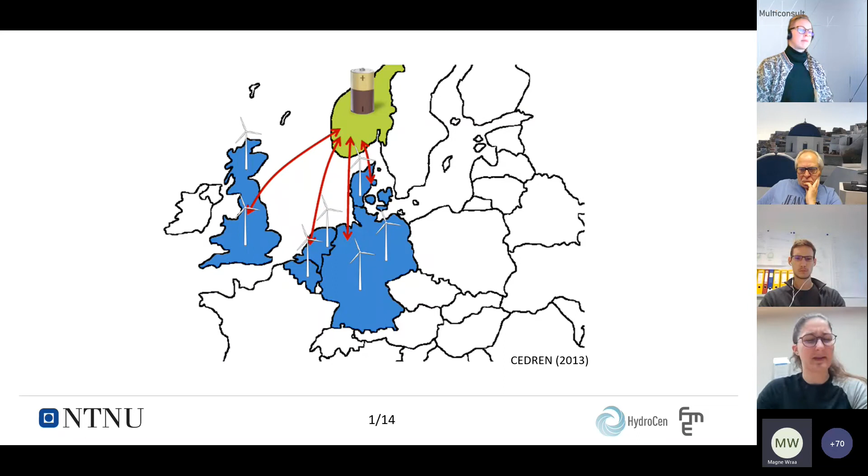Despite all this, building new large hydropower plants or new large pump storage plants is not really seen as a desirable option for multiple reasons - environmental, social, and economic. But for all these downfalls, there is one technical solution we've been working on for many years - I think about 6 years in total. That would be reconstructing already existing hydropower plants to pump storage plants. This forms the main scope of our work: enabling such reconstruction, such upgrades, while maintaining a stable hydraulic system after the upgrade.

It has been shown in literature that such types of upgrades would have a capex reduction between 7 to 15 times.

First and foremost, what we needed to do in our work was identify what challenges could stand in the way of obtaining the stable hydraulic system we wanted. We noticed there are several, such as reversed head loss due to reversed flow, mass oscillation amplitude, mass oscillation stability, and water hammer. But in principle, we focused our work on the first 3.

Finally, we wanted to propose some solutions in terms of reconstructions, either of the tunnel system or of the surge tanks, depending on where we found the need.

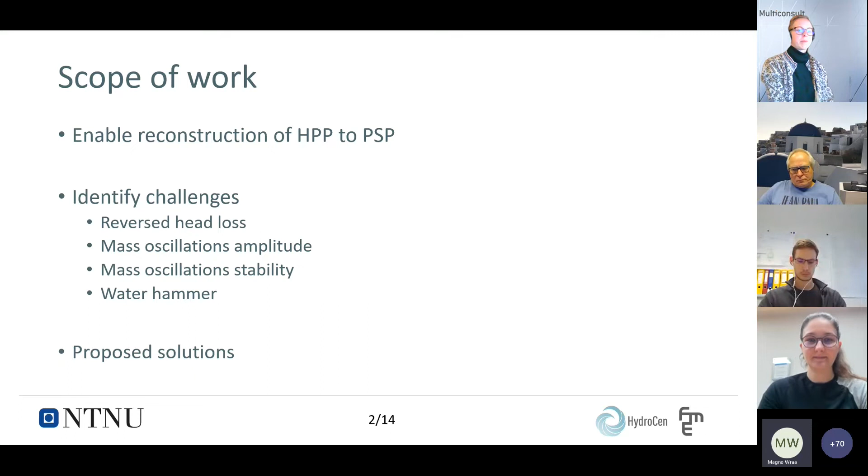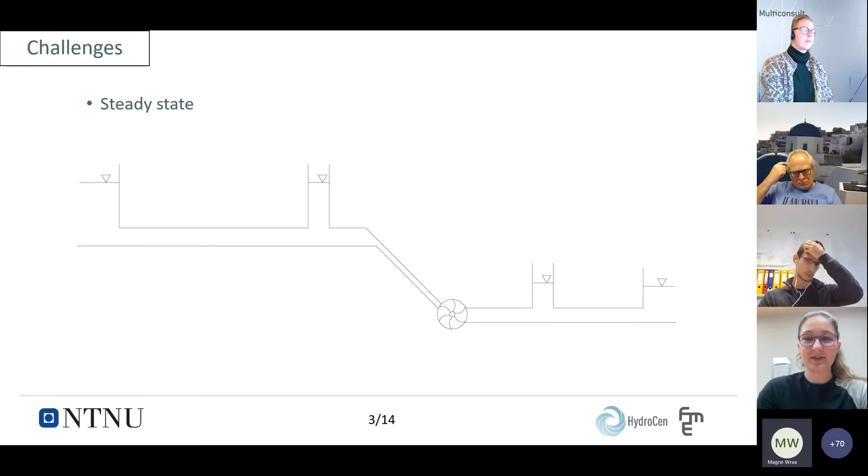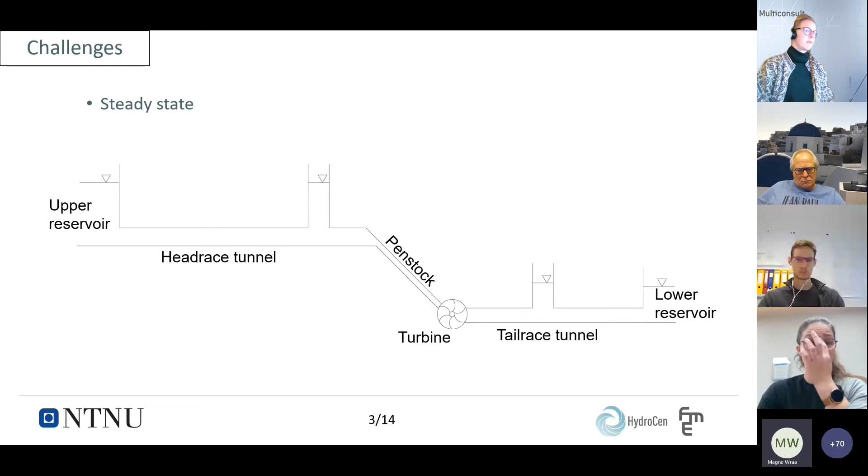If we look at the challenges, first we look at just running an existing hydropower plant in steady state. Take a general classic hydropower plant with water flowing from the upper reservoir along the headrace tunnel and the penstock, taking it to the turbine, and further leaving through the tailrace tunnel to the lower reservoir. To have it as a classic Norwegian hydropower plant, we also equipped it with an upstream surge tank and a downstream surge tank.

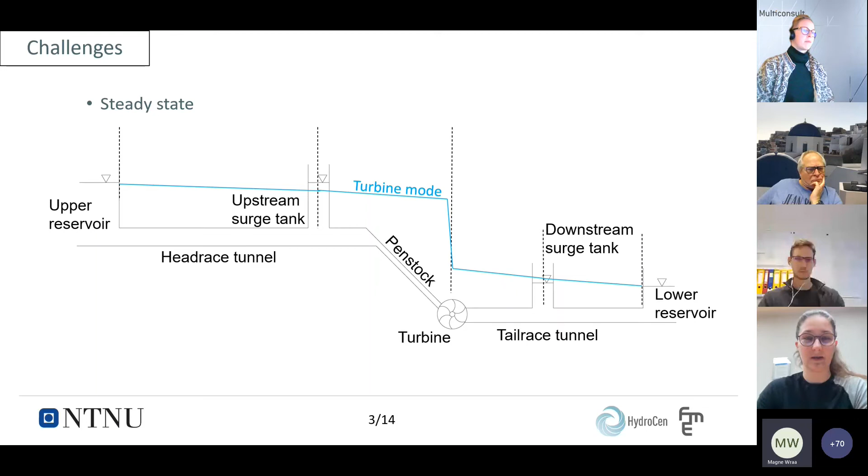If we run this system in turbine mode, then we would have the hydraulic grade line as we can see here. And this is how the tunnel system has been designed for, in order to accommodate for any kind of limit operations that would occur in turbine mode.

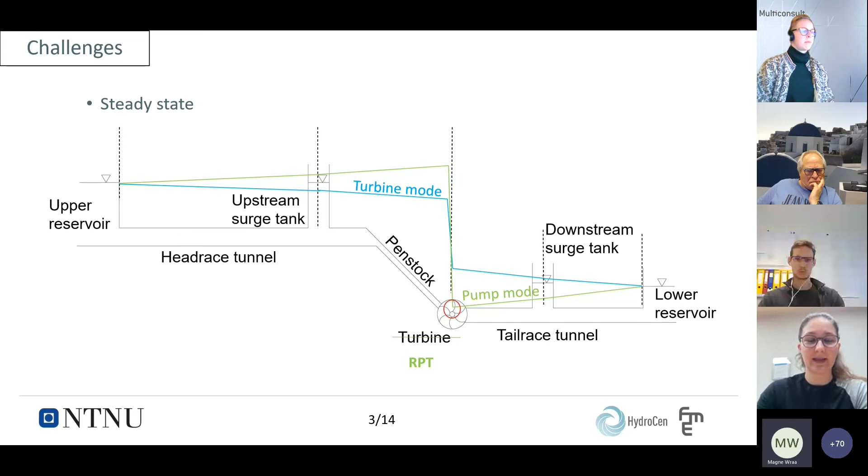If we simply replace the turbine with a reversible pump turbine, then the hydraulic grade line would change to the pump mode hydraulic grade line, the green one we see in this drawing. And already from here, problems can occur, with possible under pressure or lack of pressure at the reversible pump turbine inlet.

If we look at the same system from a transient state point of view, the surge tanks have been designed in order to accommodate for any kind of mass oscillations that would occur in the system while running turbining operations.

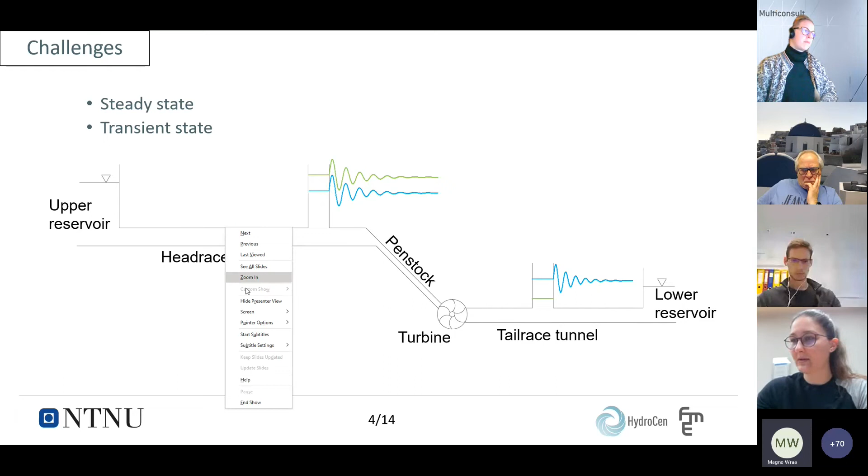If we take the same system and move it to pumping, just replacing the turbine without changing anything in the tunnel itself or in the surge tanks, then we would simply have a shift of the mass oscillations upward or lower, depending on the operating point we are working with. For upper, for example, I'm just going to point here.

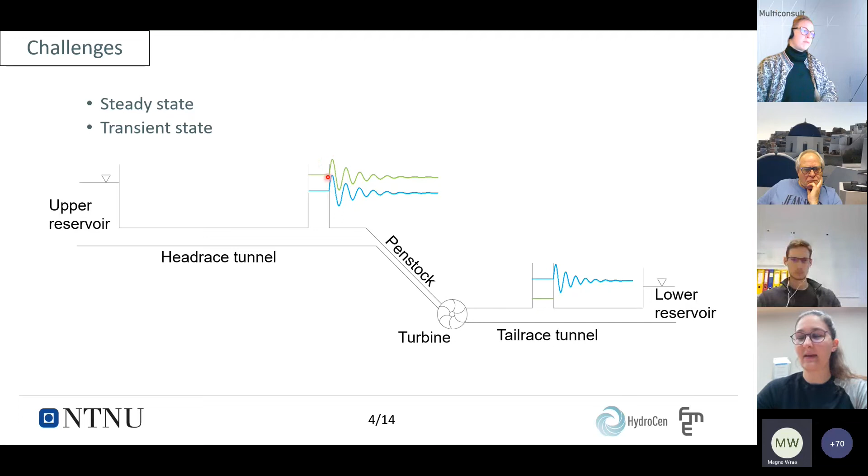So for mass oscillations in the upstream surge tank, what would happen in this case is that they would shift upwards, and then we risk that if we don't redesign the upstream surge tanks, we would have overflow resulting in flooding in the area.

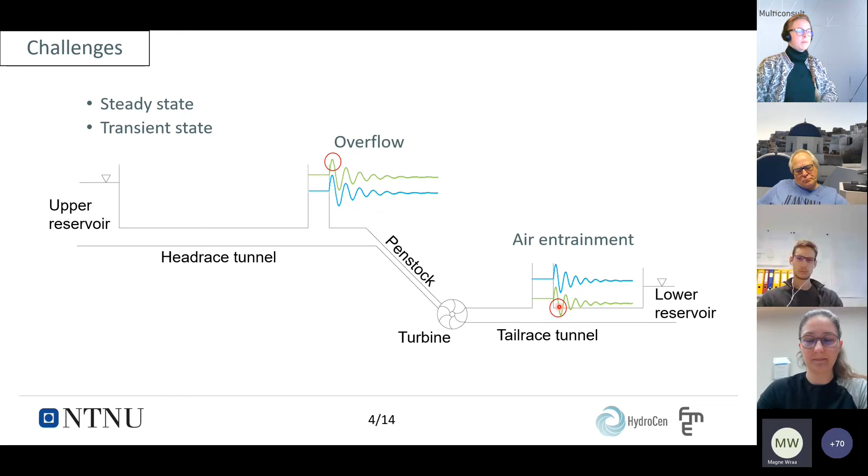A similar case is for the downstream surge tank or for the tail race surge tank, in which, in case of shifting of the water level lower than the design water level, we would have possible air entrainment in the tunnel system. And this can lead to further risks and problems within our system.

For us, in order to be able to analyze all this, what we decided is that we wanted to create a knowledge base in terms of having a technical review of existing pump storage plants in Norway.

For this, we collected information about electrical equipment, mechanical equipment, power production, civil works, operational procedure, but most important, what we collected information about is challenges and technical solutions that have already been implemented or faced by power plant owners and operators. All this information is gathered into a paper which is freely available online for anyone who wants to read it.

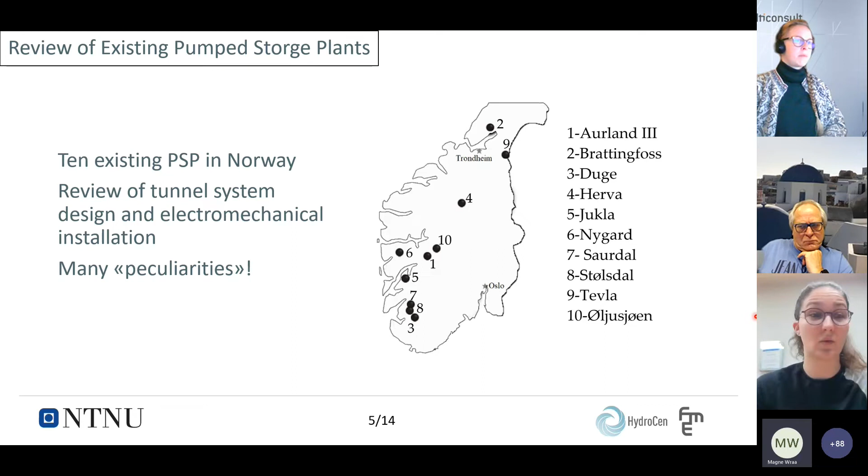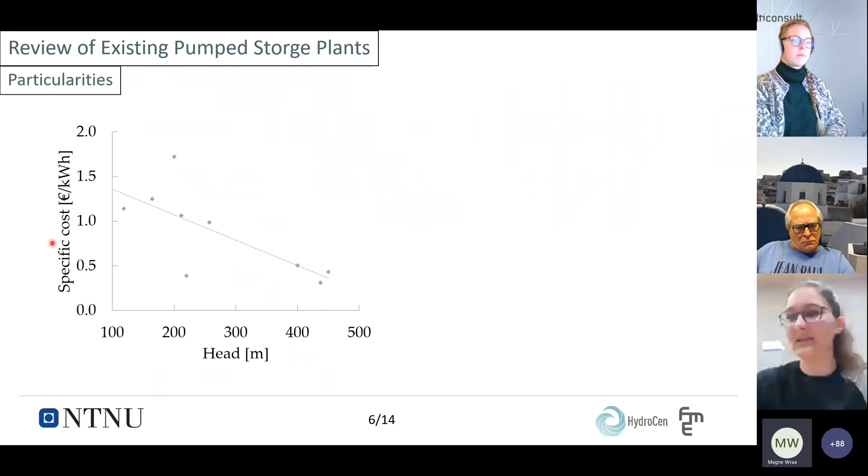But most important, what we could get out of this is that from all the information, we could calculate the specific cost. And we noticed that the specific cost is decreasing with the increase of head, as well as the specific cost decreasing with the increase of the size of the upper reservoir. And this, despite the fact that we only have 10 data points, because we only have, at the moment, 10 built pump storage plants in Norway, the trend is clear and promising.

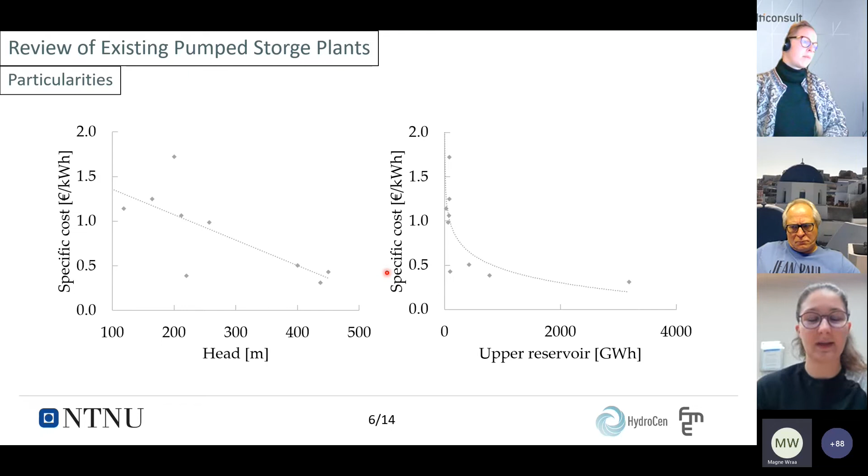For this reason, we decided to take our study further and select a prototype for further investigations.

In terms of tunnel system reconstruction alternatives, there can be mainly two alternatives. If you look at the first one, which would be building a new unit, either a pump unit or an RPT unit, reversible pump turbine unit, there would be certain advantages, such as having a low outage time, as well as having unconfined space for our turbine or for our pump.

But there are also some disadvantages, such as the cost of the new or extended powerhouse, as well as building a new pressure shaft or draft tube.

Another alternative is to replace the existing unit, what I've been showing you earlier in the drawing, with a reversible pump turbine. Such replacement has the advantage of a low civil work cost due to using already existing infrastructure, but at the same time, this also gives disadvantages because we would have a confined space for our reversible pump turbine, and there would also result in possible turbine capacity reduction, and on top of all of this, the high outage time.

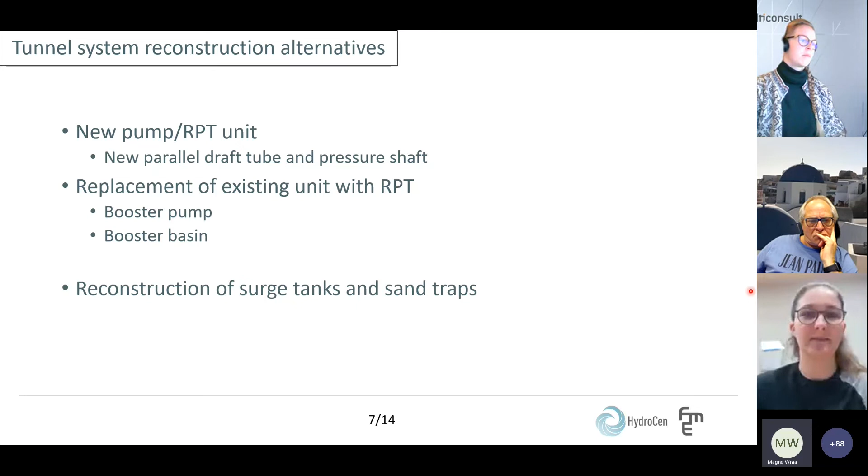Independent of which alternative we go with, either having a new pump or replacing the existing unit with a reversible pump turbine, we would still need reconstruction of the surge tanks and sand traps due to the new flow direction and new limit operations the system would be subject to. From all this together, we selected our prototype.

The selected prototype in our case was Roskrepp hydropower plant, for multiple reasons. Some such as having a high head design, which is a common design around the Scandinavian mountain range.

Also having a long tunnel system, which is 4.3 kilometers. Another reason for selecting Roskrepp hydropower plant is that we have a large upper reservoir, and it being the highest in the scheme allows us to do measurements without being confined by other hydropower plants in the region.

But most important, the reason we selected Roskrepp hydropower plant is that it has multiple surge shafts: two along the head race and two along the tail race.

So we have an upstream surge tank right before the penstock. Then we have a brook intake as well, which takes water from a side catchment to the main head race tunnel. Then we have a downstream surge tank and an adit. The downstream surge tank is actually connected through access tunnels directly to the powerhouse.

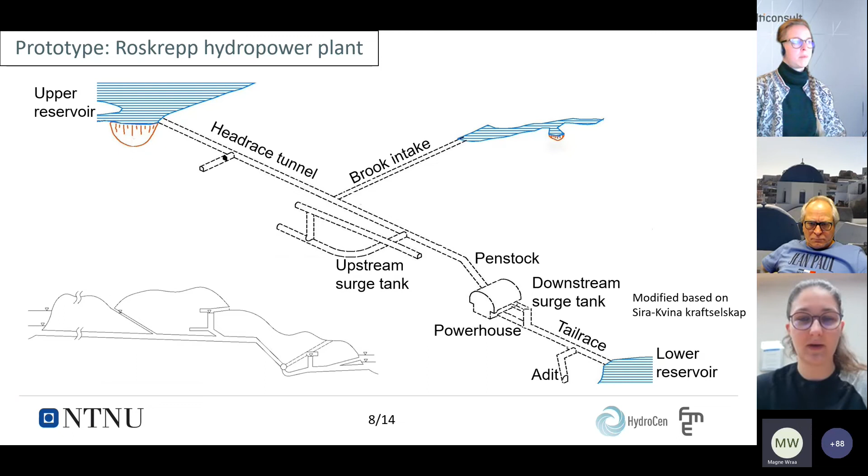The reason we also wanted to look at the adit is because there is something special about it. The inlet in the adit, or the entrance to the adit, is between the highest regulated water level and the lowest regulated water level on the lower reservoir, which means that when the water level in the lower reservoir is high, the adit is filled up with water.

It acts as an increased size of the tail race tunnel. But when the water level is low, the adit actually behaves as a secondary surge tank along the tail race tunnel.

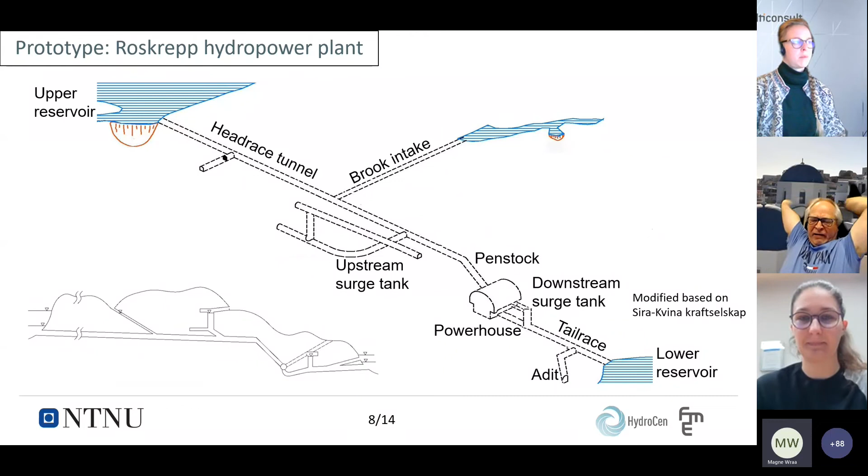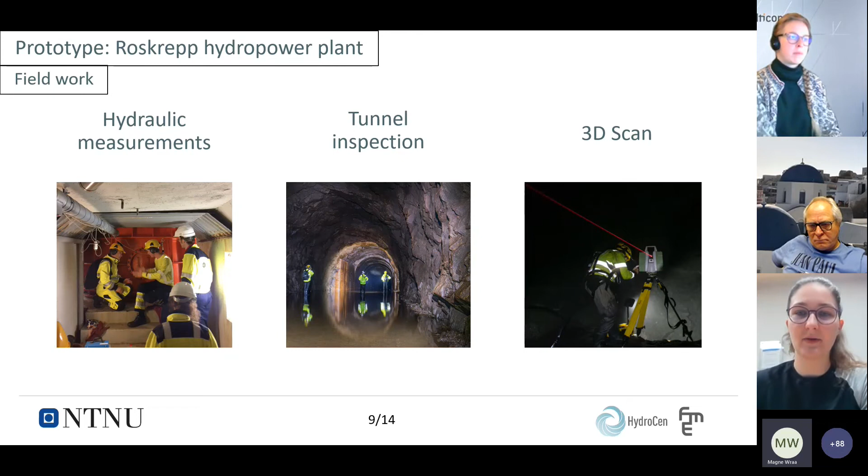So after we selected our prototype, we did further investigations. We did hydraulic measurements within our system. We did a tunnel inspection as well when the tunnel was dewatered. And one more thing that was very crucial for our work was that we got a 3D scan of the head race tunnel, the powerhouse, and some other components around.

What we found out from our 3D scan is that there could be significant differences between the construction drawings we were provided at the beginning and the actual size of the components along the head race tunnel.

This is important because it is the case for most old hydropower plants, where the construction drawings don't match the site. This is, as you might know, because of certain limitations or rules imposed by the developer to the constructor.

But the important part for us is that one component, namely the brook intake, had significant differences. In our construction drawings, we could see a slope of 1 to 8.4. But from our 3D scan, we found that the slope is actually 1 to 8.7.

Another difference we found in the brook intake is that our cross-section in the construction drawing was 8 square meters, but in reality, on average, the cross-section was 12 square meters.

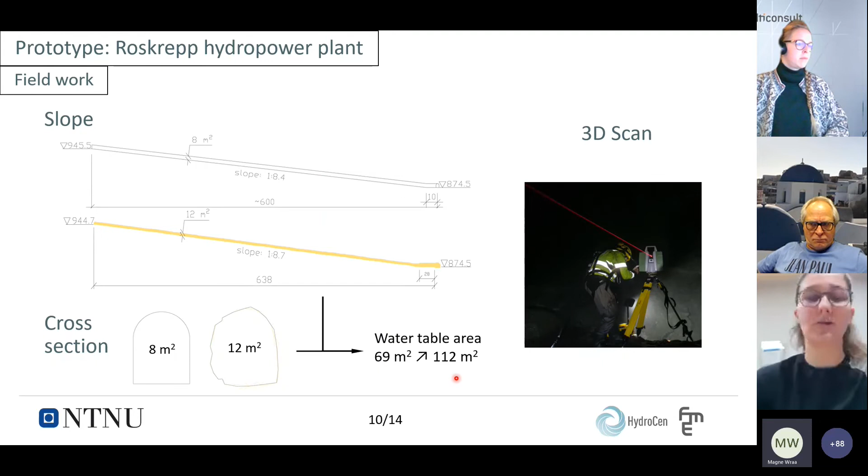From these two together, what we found is that despite thinking our brook intake has a water table cross-section area of 69 square meters, in fact it was 112, which is almost double, 60% larger. That would influence significantly how our system behaves in terms of mass oscillation.

It would also influence how accurately we could simulate or do experiments regarding this. So one thing I would like you to remember is that with an old hydropower plant, it is important to have measurements, or even better, a 3D scan, in order to have the correct and real on-site design of the tunnel system.

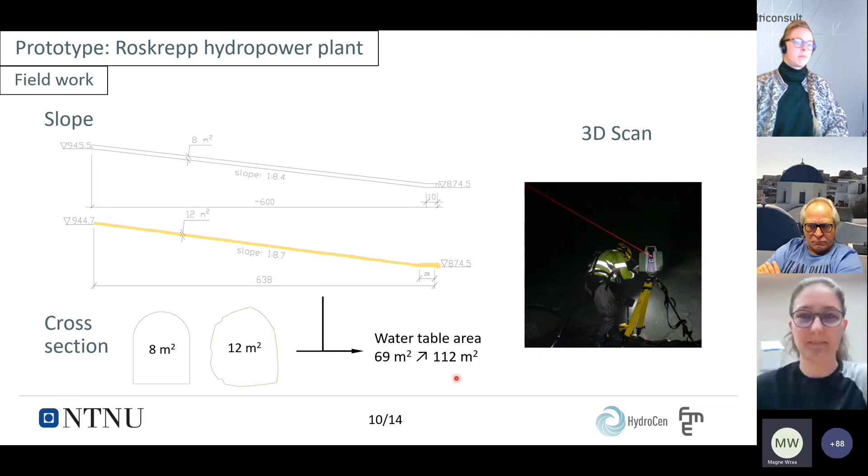So with all this information together, we went into the lab and built our hydraulic system, hydraulic model, and used it for analyzing how the mass oscillations would behave into the 4 shafts we were having along: the upstream surge tank, the downstream surge tank, the unplugged adit along the tail race tunnel, as well as the brook intake.

With all this in mind, we ran our model for the worst operating conditions in order to determine what types of limitations can be encountered within this shaft from a mass oscillations point of view. Here we are looking at one example of limit operation.

In this example, we start from a shutdown power plant, so we have discharge of 0 cubic meters per second. Then we would start a pumping mode to full load. But afterwards, we consider that a pump trip would happen and the guide vanes would be blocked, so the water would automatically start flowing in the opposite direction and go into turbine mode.

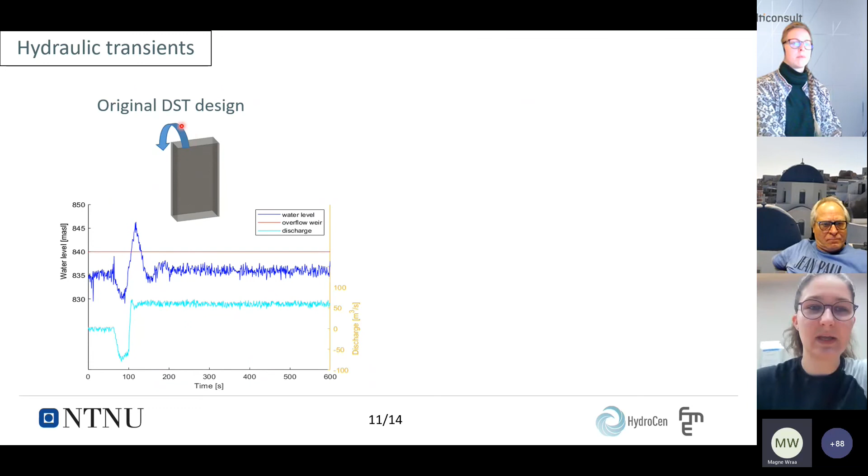All the shafts behaved okay, and we were not having any limitations in any of them except for the downstream surge tank. As you can see, the water level variation in the downstream surge tank goes above the overflow weir, which means that the water in our case would just spill out of the downstream surge tank and further into the powerhouse.

If you remember, I was showing you earlier the design of our prototype. If we look closer at the surge tank, what I said earlier is that the downstream surge tank is connected through an access tunnel to the powerhouse. So when the water would actually spill out of our surge tank, it would go directly into the powerhouse and flood the generator and further the turbine and everything in there.

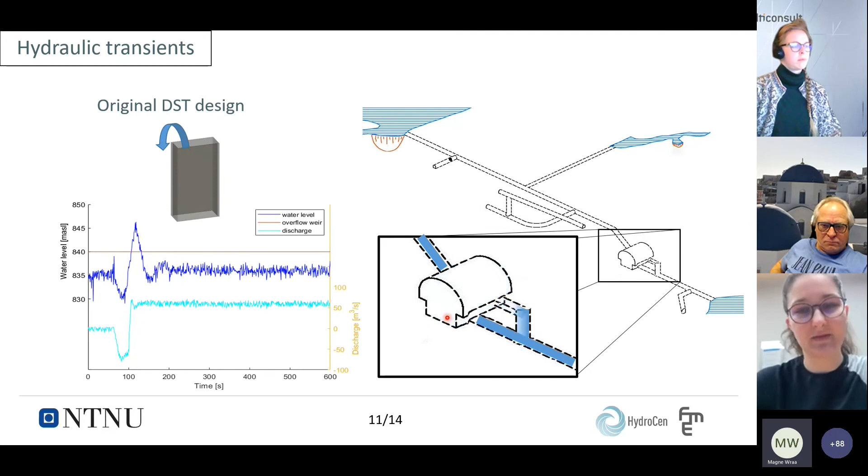For that reason, we needed to find alternatives in order to still be able to operate in pumping mode and avoid such a risk. We came up with 2 different alternatives.

One of them being a differential surge tank. So we kept the size of the original surge tank, and we calculated a riser that we could include in our surge tank in order to accommodate for this overflow and maintain the water level within the limits.

Another design that we came up with was including expansion chambers, both for the upper part and for the lower part of the surge tank, coming from different operating points. From the operating condition that I showed you earlier with pump trip with blocked guide vanes, we needed just the upper chamber, but the lower chamber was designed also due to the needs coming from other operating limitations.

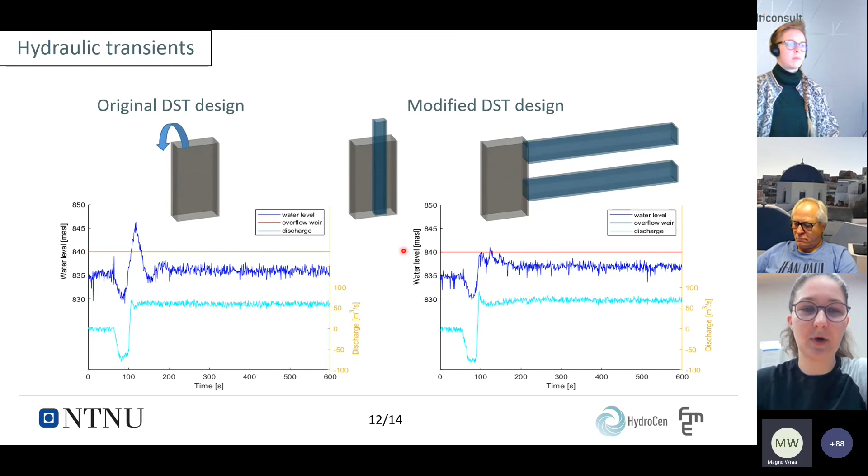The expansion chamber, the surge tank with 2 expansion chambers, we also built and checked it from a hydraulic system point of view in the lab, and we found out that for the same operating conditions shown earlier, the water level in the surge tank does not go above the overflow weir anymore, so the water is confined within the correct dimensions of the surge tank, and the risk of flooding of the powerhouse is not there anymore.

What we also looked into a little bit was a rough economic analysis, and we looked at 4 different alternatives. First, it would be the rehabilitation that I was talking to you about. Remember earlier I was talking about the fact that around 50 to 70 years of age, any hydropower plant would need to go through a rehabilitation. For this rehabilitation, we could calculate a project estimate of somewhere between 12 and 15 million euros.

If on top of this rehabilitation, we would rebuild the existing unit, so we would replace the existing turbine with a reversible pump turbine and do any other civil works necessary, our cost would increase to 30 to 35 million euros, having a marginal investment of 15 to 20 million euros.

Another alternative that we looked into is the rehabilitation coupled together with having a new unit, a new reversible pump turbine unit of the same capacity of our turbine at the moment, 50 megawatt. And for that, the project would be estimated between 55 to 65 million euros, representing a marginal investment of somewhere between 40 and 55.

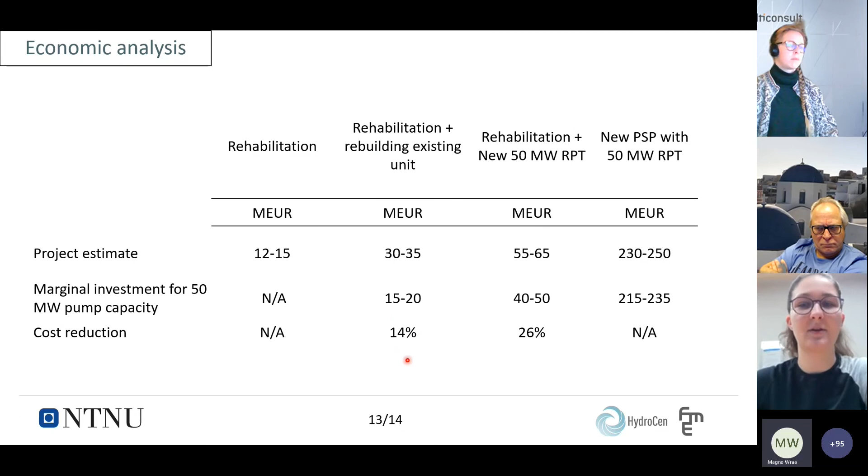So comparing to this cost, a rehabilitation together with a new reversible pump turbine would represent just 26% of our cost. And if we don't have a new unit, but we are only rebuilding the existing unit, the cost would be reduced to 14% of the cost of having just a new project.

So in conclusion, I want to say that it is actually possible from a technical point of view to upgrade existing hydropower plants to pump storage plants. And there are already available technical solutions, and there can still be technical solutions further developed. Many of them can be found within the review that I mentioned to you earlier, and some of them we also implemented in our model and found out to be successful.

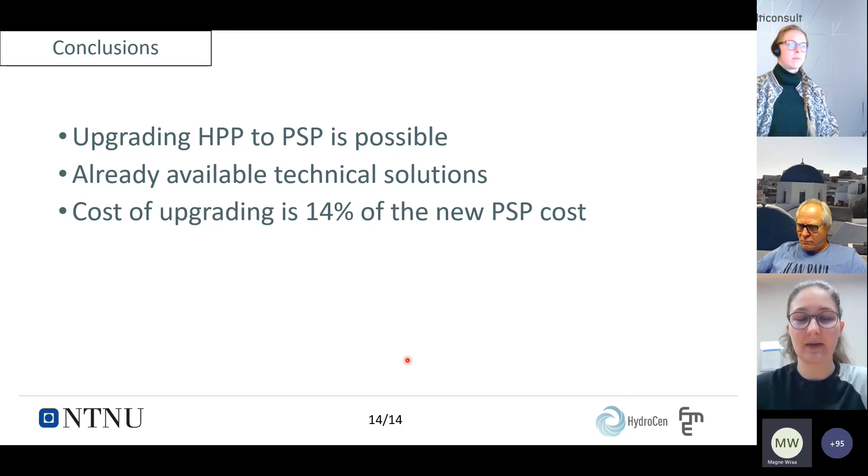The cost of upgrading an existing hydropower plant to a pump storage plant can go down to only 14% of the cost of having a new project of the exact same capacity. And then what I also want to mention is that the capex coming from literature is that the capital expenditure would actually be reduced between 15 to 17 times if we go for an upgrade rather than going for building an entirely new system.